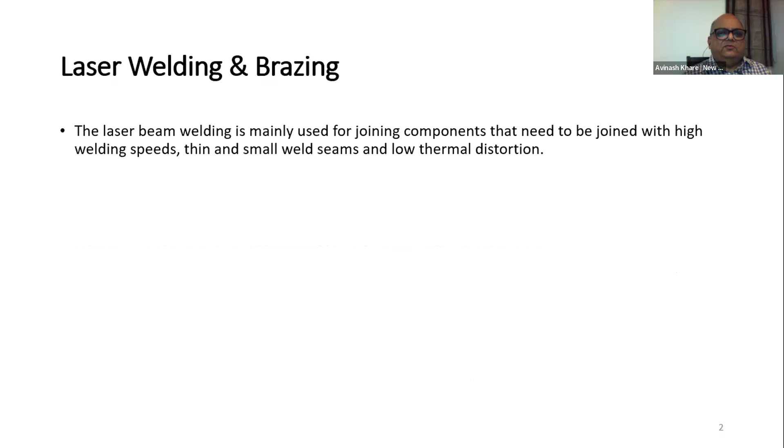Now, that is where the laser comes to help us, because the laser beam gives very intense heat on a very localized zone, and it has much lesser heat affected zone. So without heating the overall parts to be welded, if one can do welding, the heat content is less, and so the accuracy is better and predictability is that much better.

And also laser welding is much more amenable to any kind of robotic automation, because I'm sure none of us would have seen a robot doing electrode welding. A robot can do TIG welding, MIG welding, but a robot cannot gauge how much electrode has been consumed and so how much and at what rate it should be fed. So one never sees a robot doing electrode welding for that matter, right?

But there are still many variables when it comes to welding in terms of arc gap, in terms of wavering, in terms of electrodynamic force. So a lot of welding is dependent on operator skill, and operator skill is becoming costly and scarce. Therefore, automation makes a logical sense.

So to summarize, two major advantages that you get with laser: amenability to automation, robotic automation, ease of automating, the flexibility, and also very less heat and very localized heat, reducing the thermal distortion overall. So much better control on the distortions, much better control on the thermal effects, which are anyway not very predictable or accurately controllable, right? That's the art and science of welding.

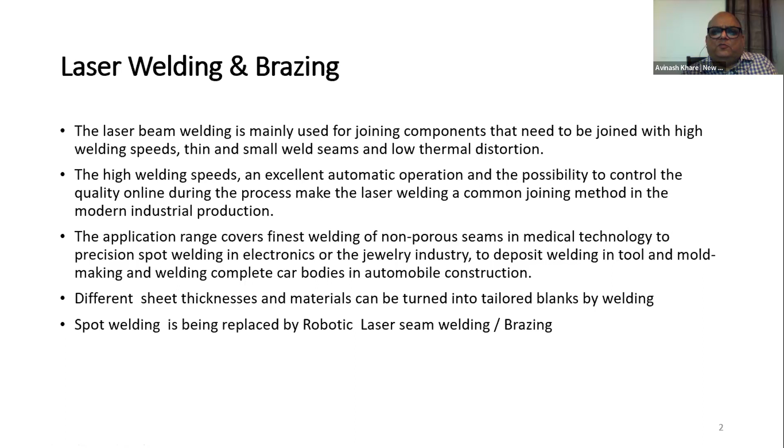The primary difference in welding and brazing is that in welding, the deposit has a metallurgical bonding with the substrate, wherein in brazing, it does not have a metallurgical bond. It's just filling the gap, like soldering. And brazing is a word which has come from brass. So when the filler material is brass, we call it brazing. It's as simple as that, right?

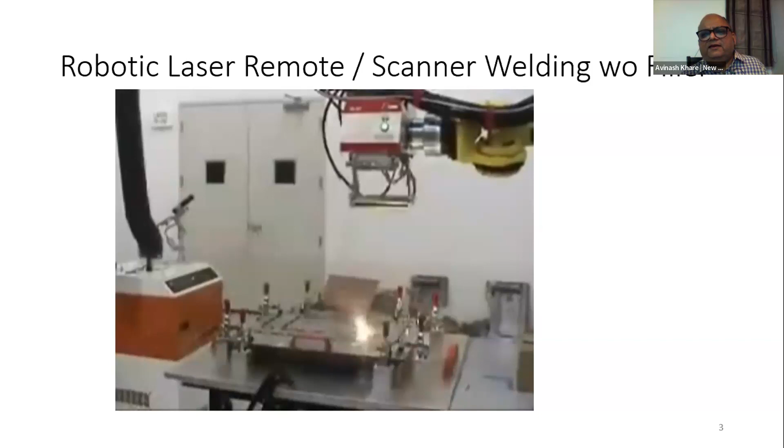There are many advantages in this technology. It's also known as scanner welding. But this is being done from a distance. You can't use filler in this one. So this is like in spot welding also, one does not use a filler. So it is comparable with spot welding, where you don't have to use filler. You just throw the heat, and with heat, you glue the two sheets with some pressure that is applied by the fixture primarily, right? So that's the technology we are going to talk about.

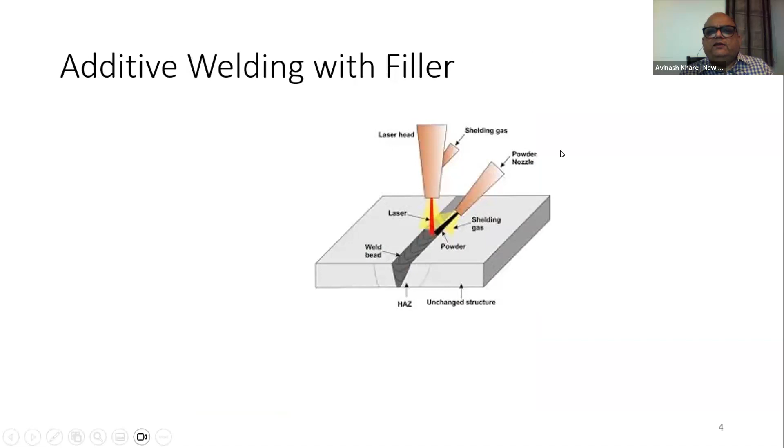Talking of other kinds of laser welding, of course, one can have laser welding where filler is used. It could be a wire or it could be a powder, which could be thrown with a nozzle, and on the fly, you can go on doing welding. So it could be, of course, a laser welding using a filler.

Now, this is welding.

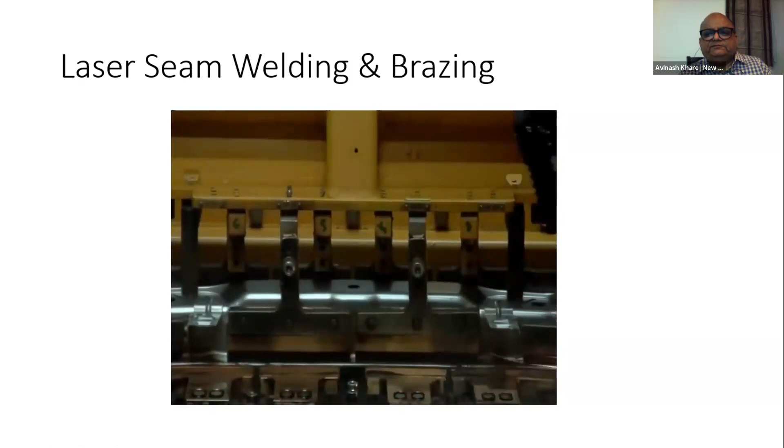Now, this is a different arrangement. This is brazing, because of the color, the brass color is different. So the color of flame looks different in case of brazing.

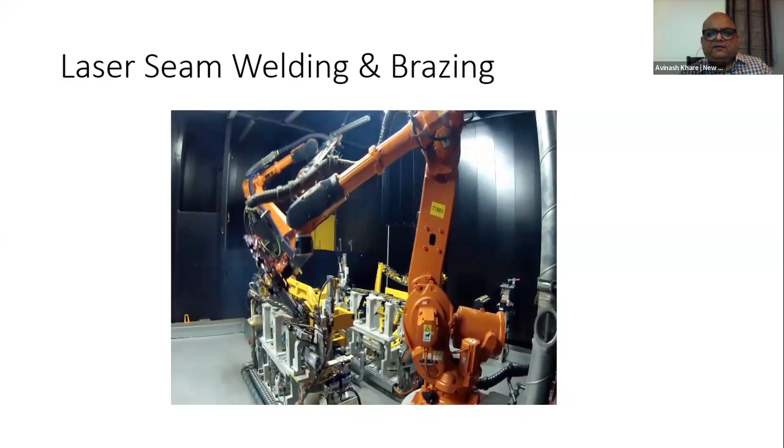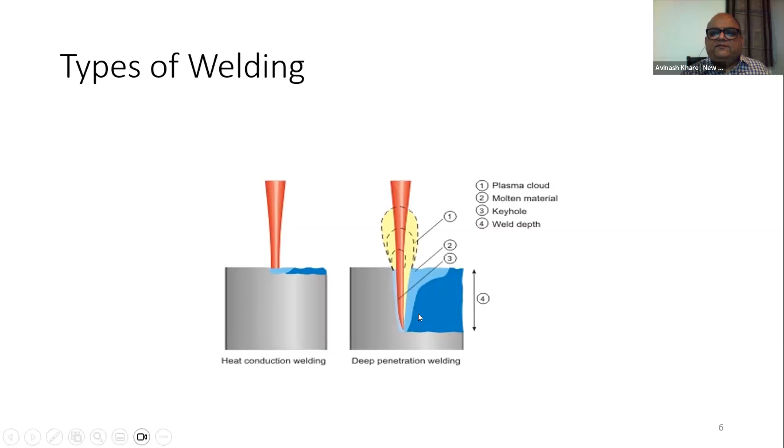Now, a lot has been spoken about it, so I will go a little faster here. These are the processes, just the description of what is conduction welding and what is deep penetration welding.

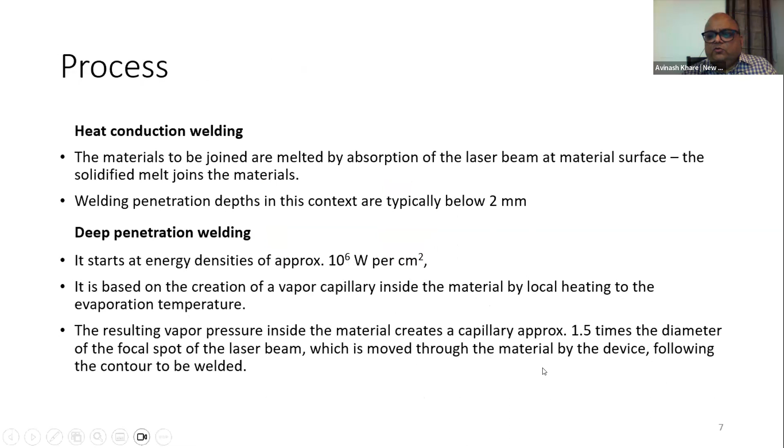Conduction welding typically has a depth of up to 2 mm. Here, for keyhole welding, the energy density is much, much bigger, it is 10 to the power 6 watt per centimeter square, and you can have a depth of as much as up to 25 mm or so. So with sufficient laser power, you can have weld depth of up to 25 mm.

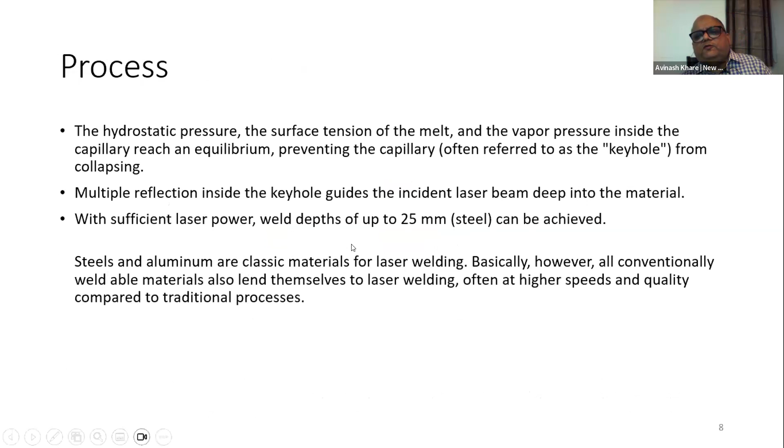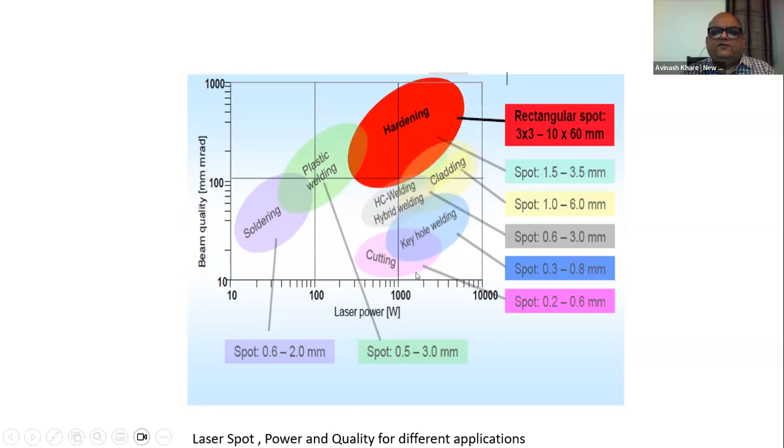That's additive manufacturing actually, that's coming above this one. So this is the kind of laser variance which is required.

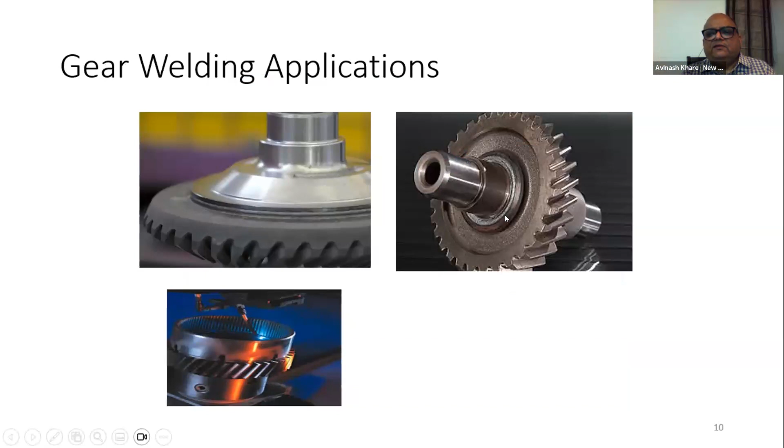The applications of laser welding: of course, gears can be laser welded because you can't afford thermal distortion in a gear, so you need to control the heat very locally. Therefore, laser is used for welding gear to a plate, for example, and multiple gears can be welded together. This kind of laser welding has been in vogue for about a decade or even more.

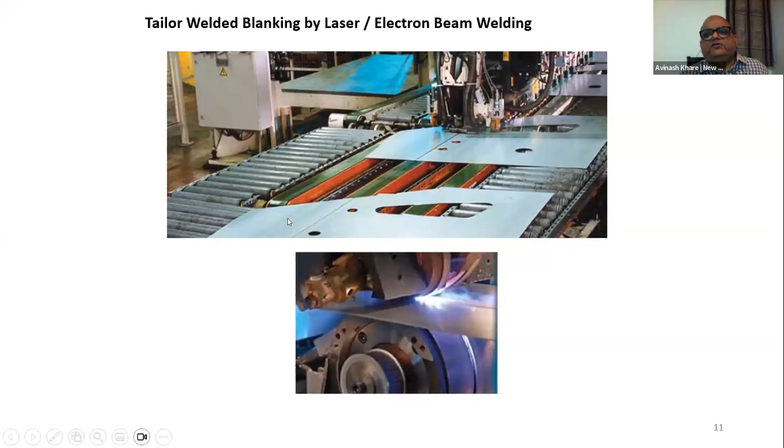The other area where laser welding is used for sheets is tailor welded blanks. Nowadays, people want higher strength strips attached to the blank, a bigger blank. So you have a composite blank put into the die, and the two sheets have to be laser cut and laser welded or electron beam welded. This is a technology where electron beam or laser welding is done to prepare the tailor welded blank, so you have a combination of higher strength and lower strength in the same part.

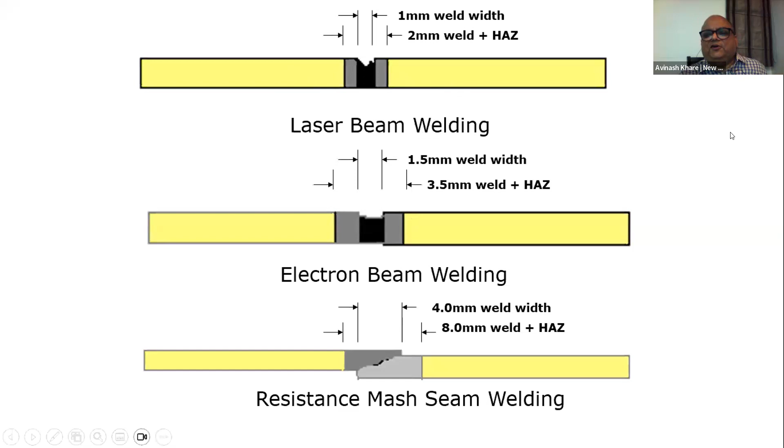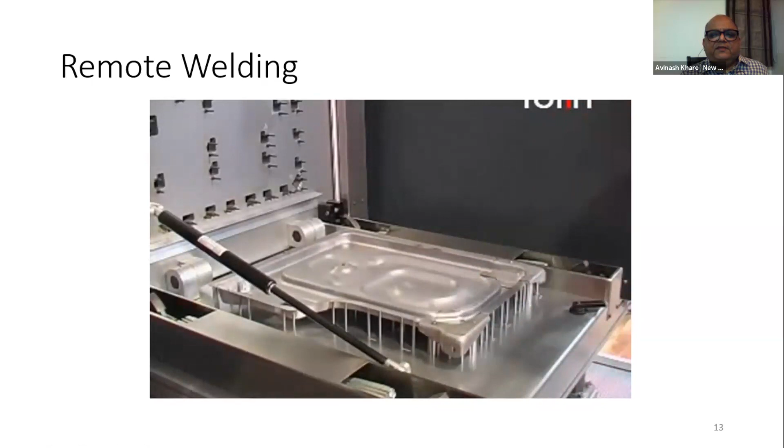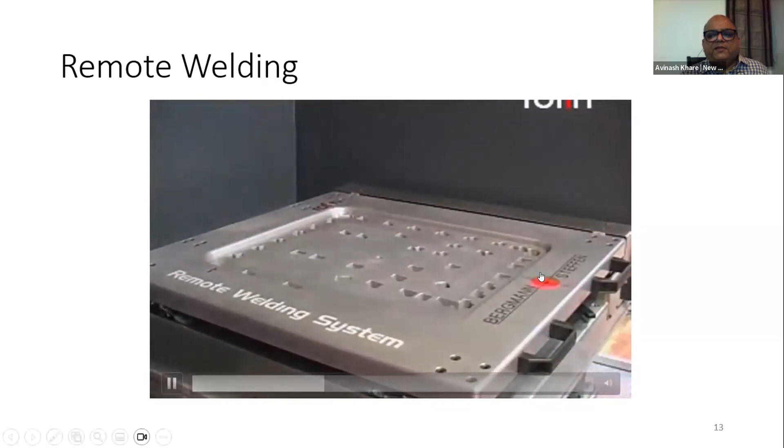Now coming to laser remote welding, let me show you this video. So this is a fixture. The parts to be welded are placed in the fixture -- the corner reinforcement, the inner and the outer -- and the fixture gets closed. The fixture has some holes, as you can see, and then the welding happens and the job is done.

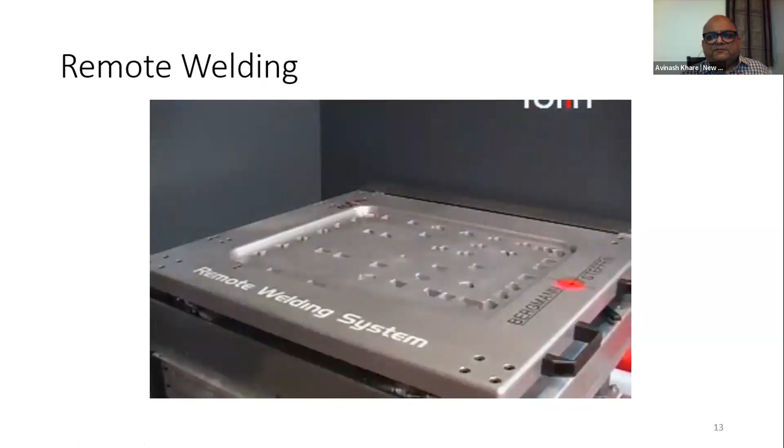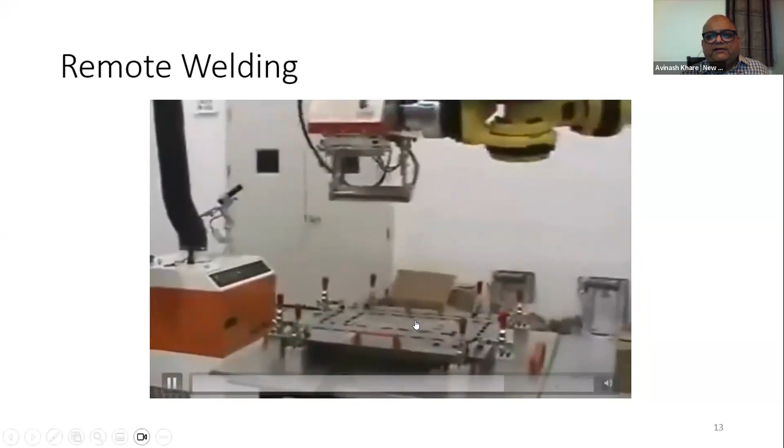You did not see the welder, you did not see -- this is what it is doing. So from a distance, pulses of laser are shot through the line of sight and the welding happens.

There can be features where, if the seam is shifting during welding due to heat, you can detect the seam and direct the laser accordingly, adaptively. This is called adaptive welding, where remote welding can also be done adaptively. One can have seam movement detection because it's not perfectly accurate -- the seam will go on shifting as the heating takes place, shifting left or right.

You can't have micron accuracy in a sheet part to be welded, or there could be part-to-part variability. So here the adaptive part comes to our rescue, that you don't have to unnecessarily have a lot of accuracy just to have automation. The automation has to adapt to inaccuracy -- that's the trend going forward, that automation has to do all the adaptation.

So the automation has to find the seam, and the automation has to divert the beam to where the seam is. Otherwise, if you just set it, the robot will blindly follow the trajectory -- whether it gets welded or not, the robot cannot know. So when you say robot welding, it often turns out to be blind welding, like a blind man welding while running along a trajectory.

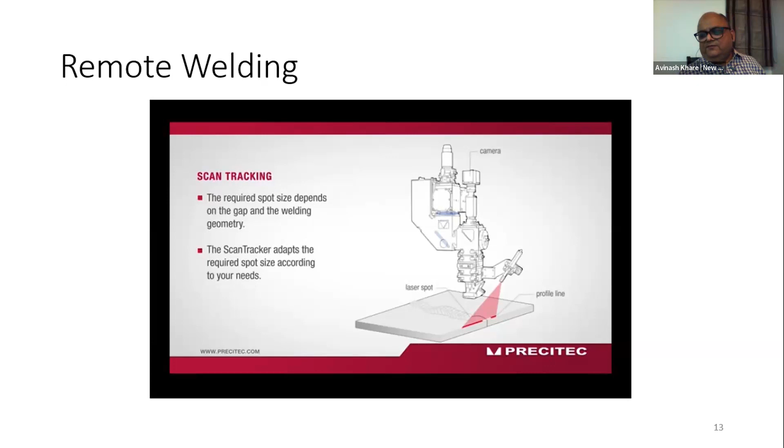Now these kinds of things are happening, and one thing you would appreciate is that in this kind of welding, the XYZ movement doesn't actually happen. What happens instead is the angular movement of the mirror, as you can see in this video.

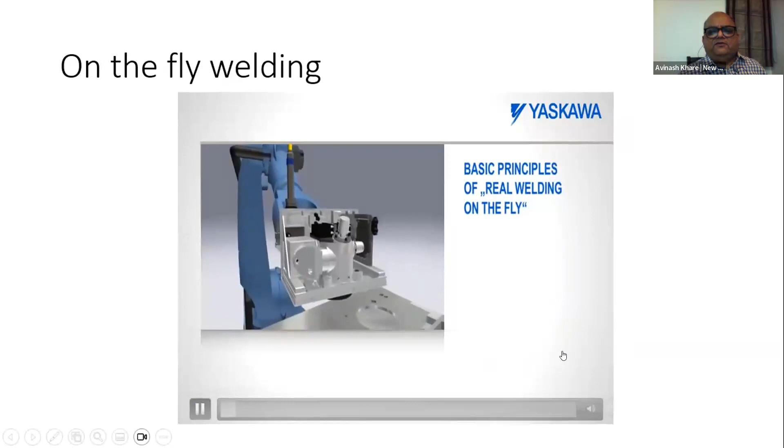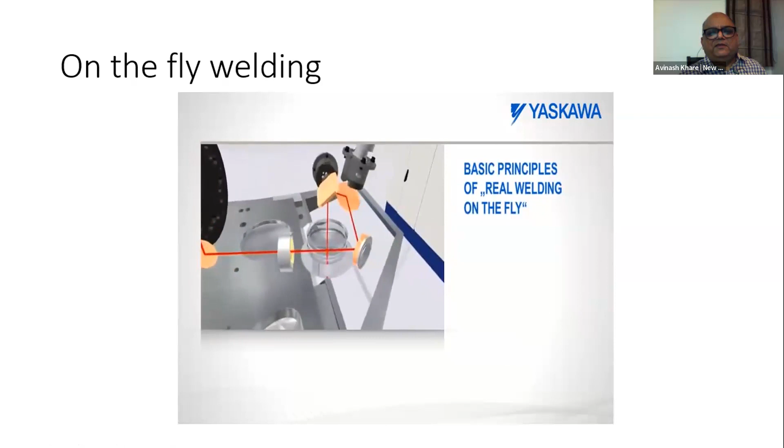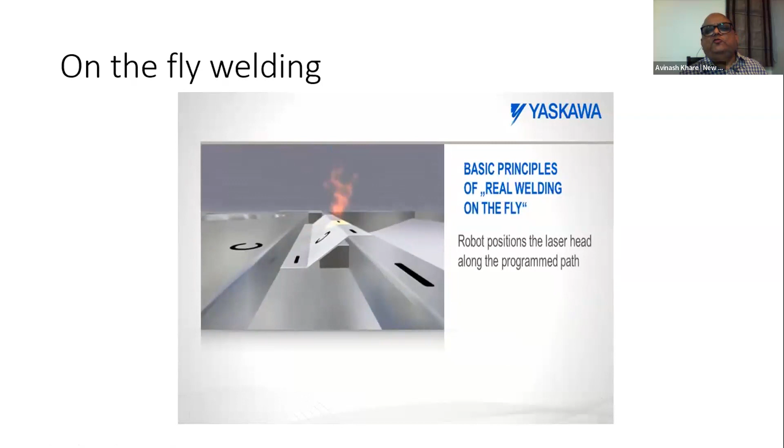But you see, as the welding is happening, what is moving? Only the angle is moving. It is much faster to move an angle than to move an XYZ, right? So for that reason, scanner welding is a darling technology because it can do a much faster number of spots. As compared to spot welding, this is anytime much faster.

That's why it is being preferred. Plus, on the adaptive side, there are two sides of controlling quality. One is the predictive approach, where you do simulation and have a lot of empirical data based on past experiential data. You decide the process parameters, and thereby you get a better quality.

The other school of thought is the adaptive school of thought, where people are working on combining thermography with welding. There is a thermographic camera which is sensing the heating and the depth, and it is modulating the power and speed of welding on the fly. That's the future.

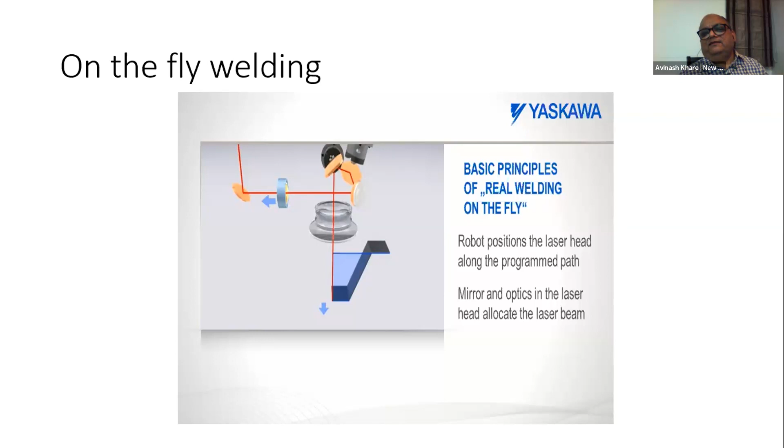So adaptive automation is the future, where the inaccuracies and variabilities in the process will get taken care of through automation, and still the quality will be maintained. So that's my take on quality.

Now, this is what I was saying. If the weld seam is irregular, you have something like a barcode reader which can detect the seam, and it can make the robot throw the laser exactly at the seam dynamically. One doesn't have to do precise programming; you can do coarse programming with such a wide tolerance.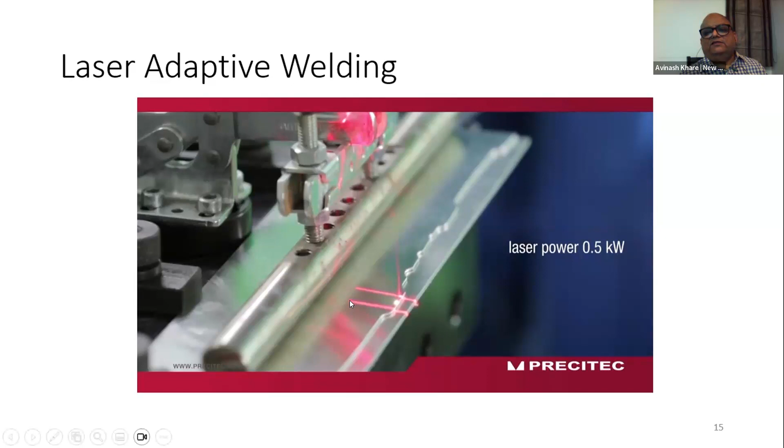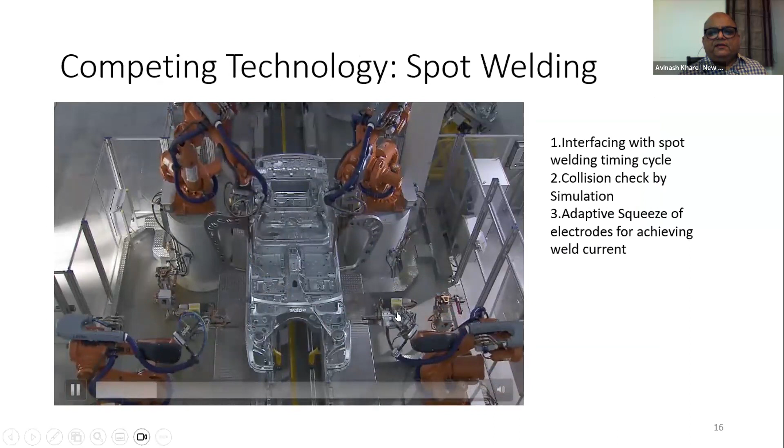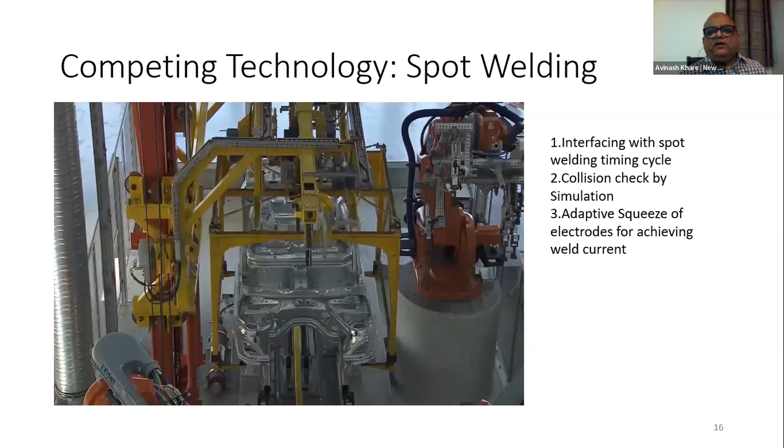As compared to conventional technology, this is conventional spot welding. You see, you have to make such kinds of fixtures and ensure that robots don't hit each other. So a lot of software simulation has to be done to ensure accessibility, to ensure ergonomics, and to ensure that there is no fouling.

Now, all these things you can do away with when you do scanner welding or remote welding, as I have shown. Here you will see that a robot has to pass through a small hole also, and it can very easily hit the job, or robots can collide with each other. All these complications go away once you do remote welding.

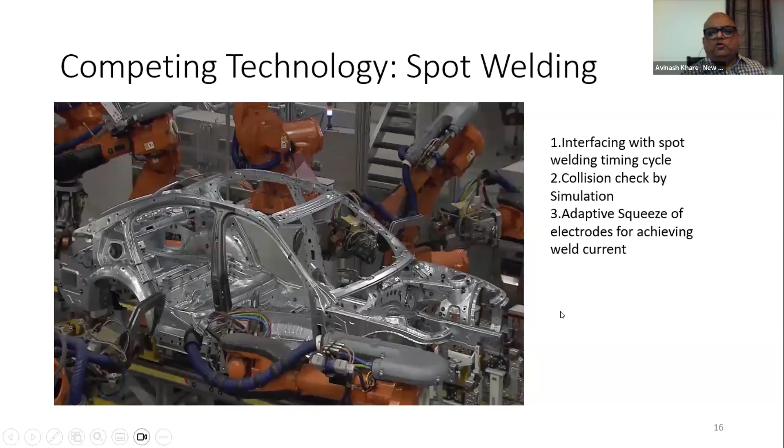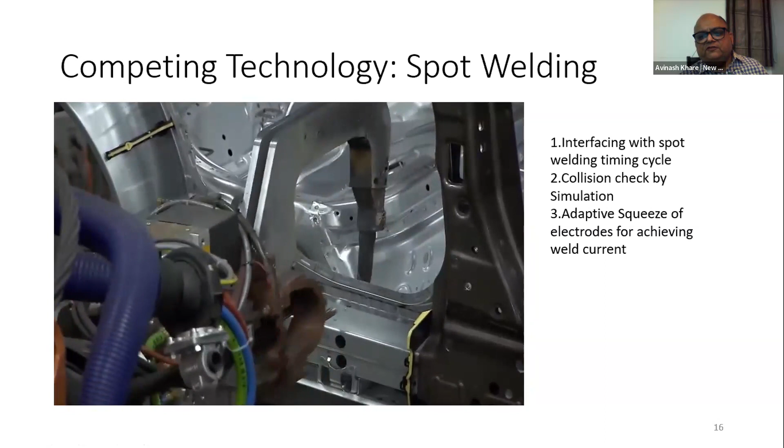You see here, the electrode is pushed through the hole. It's very easy to go wrong here, right? These kinds of reach problems—all these problems get eliminated once you do remote welding.

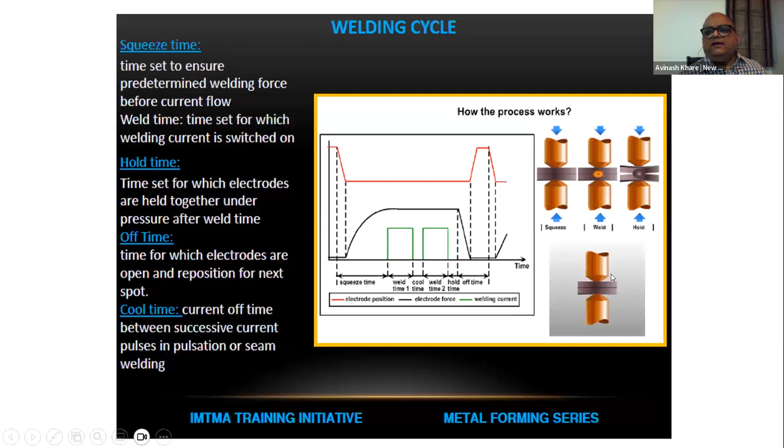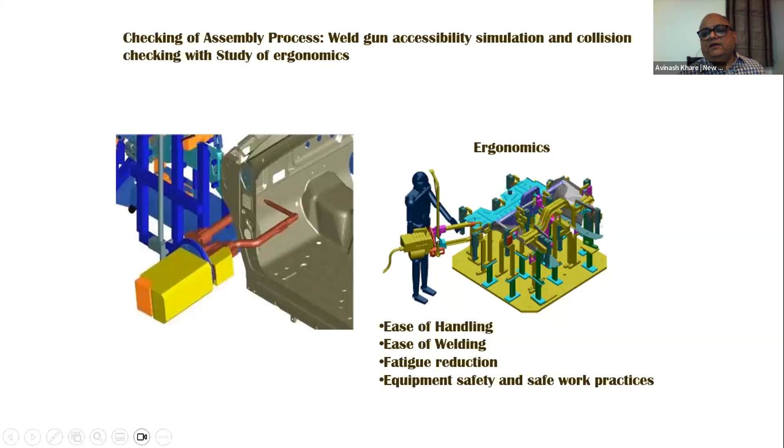And here, of course, there is a cycle time. You have to press, pass current, allow cooling, and then retract. Plus there are so many pythons hanging from the gun, which is a mess that can entangle, and the operator has to lift the gun. So you have to do simulation of approachability, so that nothing will foul, and also ergonomics—how tired will the operator be doing spot welding day in, day out.

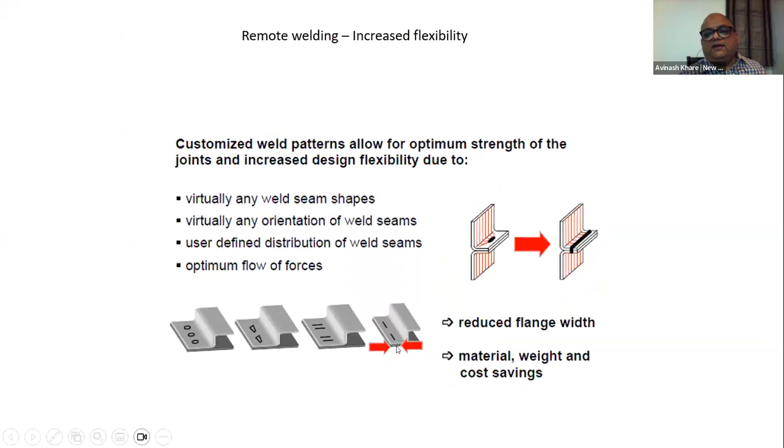So these are the advantages when you do remote welding. Another additional advantage is that with remote welding, you can draw a round spot, a square spot, or a line. There is an opportunity to reduce the flange width—if you do welding like this, you can have a much lesser flange, so you can save on material as well.

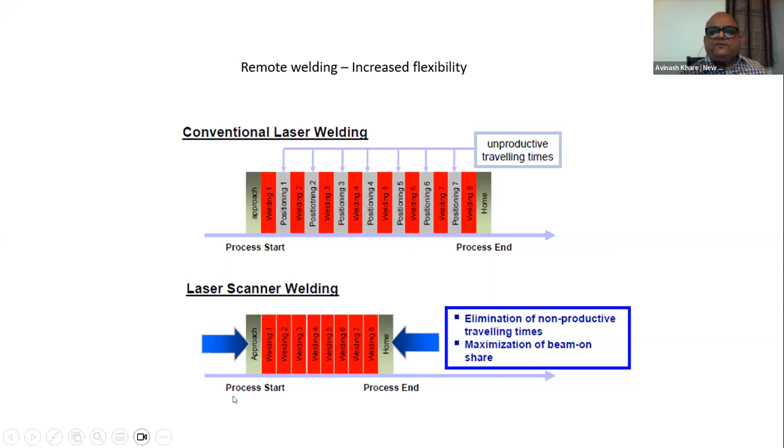So these are the advantages in summary. Now, basically in conventional laser welding, if there is an XYZ movement after each weld, this is your cycle time, and you have to do a number of weldings. With remote welding, because you are only moving the mirror, it can be much, much faster. So that is the time saved.

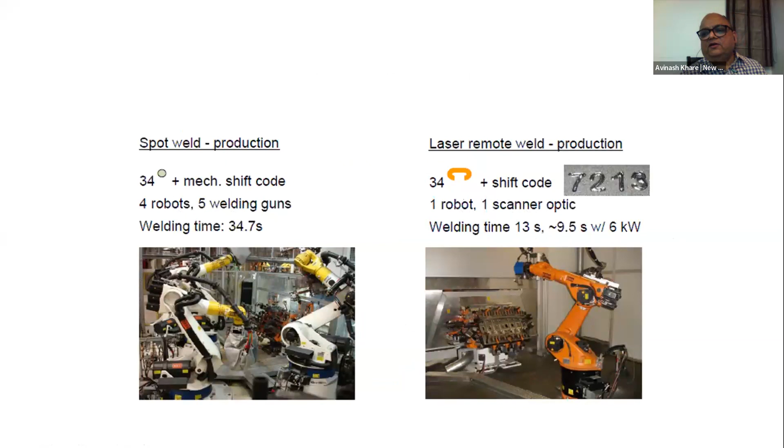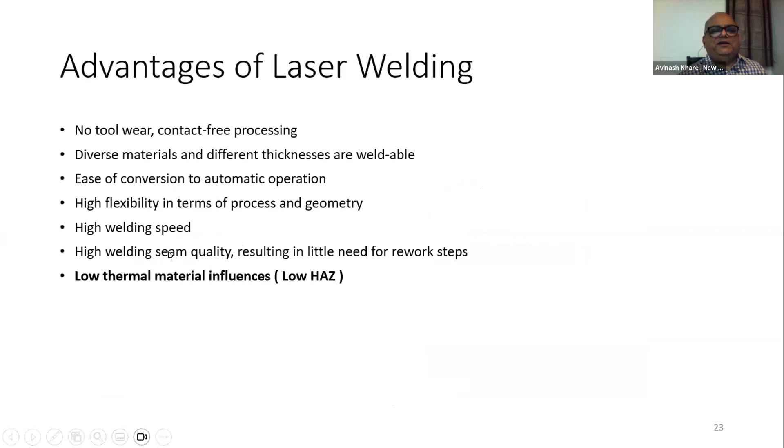So in short, these are the advantages: basically low thermal influence, high welding speed, and amenability to automation.